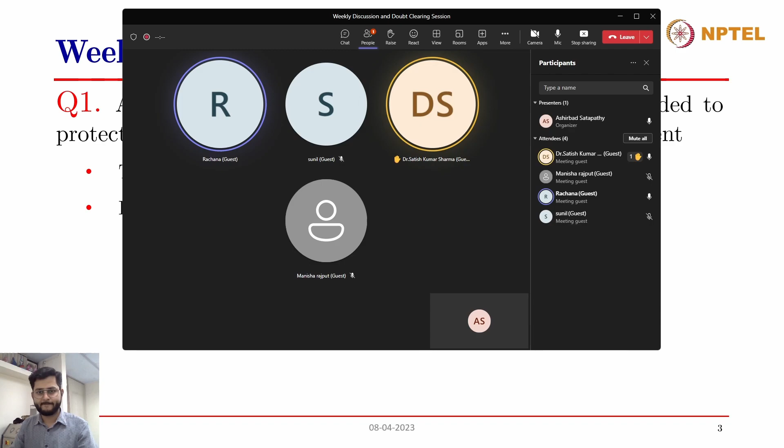I guess nobody- Rachana, do you want to answer this question? Which one, sir? The first question that I just read out. Can you see my screen, Rachana? Alkyd coatings can be recommended to protect the exposed concrete surfaces in a coastal environment. True, sir, true. Alkyd coatings can be recommended as per the lecture, because some questions are related and some are not. No, I differ.

Answer is false. In the lecture, they told that this type of coating is meant for steel and timber, not for concrete. So the statement is false. Yes, thank you, Dr. Satish. Actually, this is a false statement. If you have watched the lectures carefully, alkyd coatings are not recommended to be applied on concrete surfaces. Rather, these types of coatings are used to protect metallic components like steel or any other metal components, or even timber surfaces. This was in fact specifically mentioned in the lecture, that on any kind of concrete surfaces, these kinds of coatings should not be used. So this is a false statement. Alkyd coatings are not to be used on concrete surfaces.

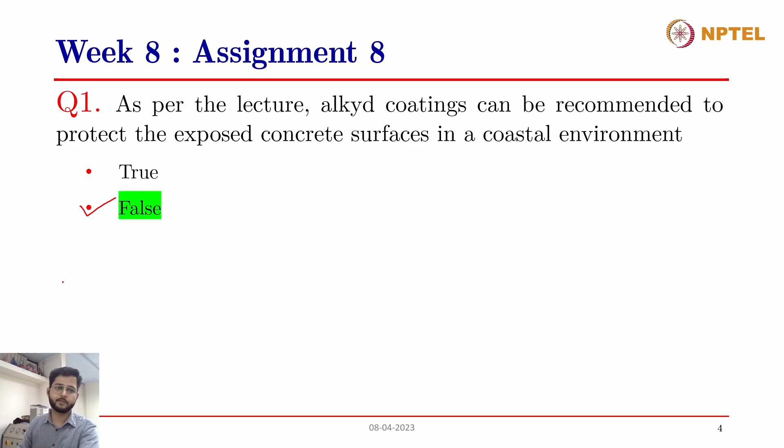All right, moving on to the second question. It was decided to coat the interior surface of the chimney of a newly constructed nuclear power plant. It's a nuclear power plant, and the interior surface of the chimney is to be coated. Which among the following should be the two primary features of a good coating material for this case?

These are some of the features that have been listed out: high vapor permeability, high dynamic crack bridging capability, low resistance against temperature, good resistance against possible contaminants. Which of these features, two features, will you be selecting for coating the inner surface of a chimney in a nuclear power plant?

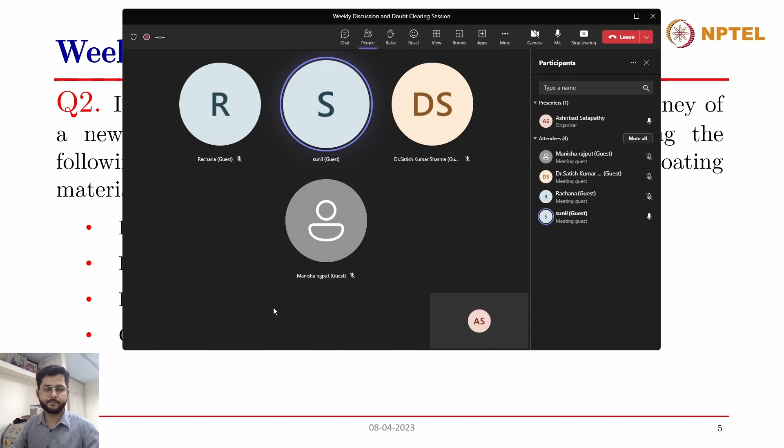Yes? Can somebody answer? High dynamic crack bridging capability and good resistance against possible contaminants. Okay, and would you also try to answer, Sunil, why would you choose these two properties and not the other ones?

Actually, I am not familiar with this question. It is the 8 week assignment, and now it is running week 11, 12, so I am not remembering exactly the theory behind this. Okay, that's the issue. As per lecture, high dynamic crack bridging capability... but after checking there is a good resistance, I checked it out, I only clicked the second one.

Okay, thank you for answering. Both these answers are correct: high dynamic crack bridging capability and good resistance against possible contaminants. First of all, high vapor permeability is not to be considered because we don't want water vapors or any other gaseous substances to get inside the concrete. Therefore, one of the primary requirements of a coating is to prevent the ingress of these vapors into the concrete, and so it should not be permeable to vapors. So this is a wrong statement.

Second is high dynamic crack bridging capability. Since this is an industrial structure, a chimney, it might be exposed to vibrations, so there is a possibility of formation of cracks due to dynamic forces, since a chimney is a stack-like structure and a very high rise structure. Therefore it is also subjected to wind loads at a greater height, a large amount of wind loads, and so there are a lot of dynamic forces acting on this stack-like structure, which leads to a possibility of crack formation.

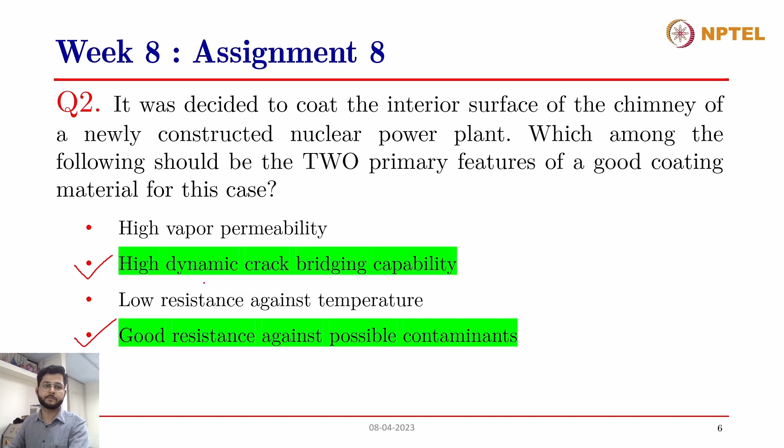Moving on to the third question: applying polyurea coatings over concrete pipes are sensitive to blank and blank. Some properties listed regarding polyurea coatings include pot life, mixing ratio, relative humidity, and atmospheric temperature. Can somebody answer this question?

Pot life and mixing ratio. Yes, pot life and mixing ratio. Why would you answer that?

Can you explain what is pot life and what is mixing ratio, Sunil?

Anybody else wants to try? Yes, Dr. Satish, you can go ahead.

For these types of polymer systems, in case of any material of that kind, pot life is very important because beyond a certain time limit it will not be very effective and will not be usable, so you have to keep control of the timing. Mixing ratio is again very important—these are organic materials, and unless you mix them in the specified proportions, you can run into problems.

Okay. I guess I was stuck—there is some issue on the internet on my side, I guess. Yeah, probably. Yes, I think you missed some of it.

Dr. Satish, you were explaining what pot life and mixing ratio are. Sorry, I missed your statements due to some issue on the internet.

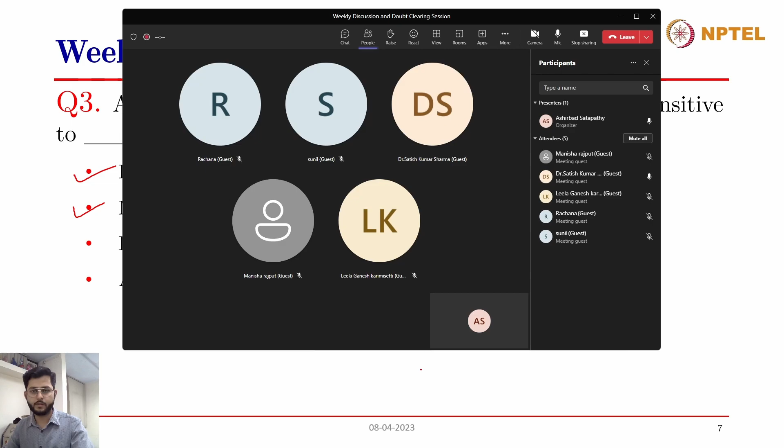For any chemical of this kind, mixing ratio is very important, and there is a certain time limit within which you have to utilize the material, otherwise it will be wasted. So pot life and mixing ratio are the most important aspects. Since only two options are asked for, these two are the most important—others may be important, but the question asks for only two.

Thank you, Dr. Satish. Yes, so these two are the correct answers: pot life and mixing ratio, in case of polyurea coatings, polyurethane coatings, or any kind of epoxy coatings as well.

What is pot life? I'll explain. In case of these types of coatings, they don't come as a single compound. Rather, they come as two compounds: one is part A and part B. One is the polymeric substance that will be applied as the coating, while the other is a solvent or accelerator that allows for the setting of both compounds when mixed together.

Part A is generally a pigment or polymer, and part B could be an accelerator or solvent. These two parts are mixed together, and the mixing ratio is the proportion of part A to part B.

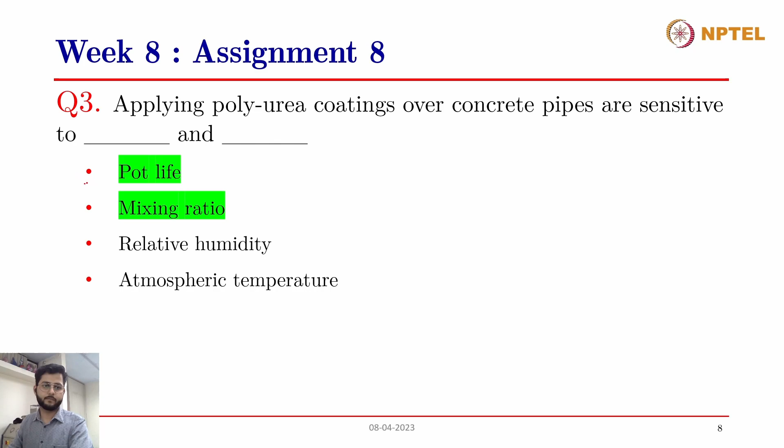So these two are the answers.

Moving on to question number 4. Typically, which among the following two waterproofing systems will help to provide a barrier and prevent the capillary rise of water from the ground to the concrete floor? The options given were horizontal water stops, drain boards behind the wall, weep holes, coarse sand layer below the floors.

This is regarding waterproofing systems to prevent the capillary rise of water from the ground to the concrete floor. So this is a horizontal surface, the concrete floor, and we want to prevent the water from rising from the ground. Which of these two waterproofing systems would you choose in this case? Yes, can somebody answer?

Yes, Dr. Satish, go ahead. Since other people are not volunteering, I would like to reply.

Yeah, your last line was not very clear, can you repeat it again, Dr. Satish? In case of coarse sand, capillary action will be minimized or will not exist. You require very fine grained soil only for capillary action, like clay etc. Here, it is a coarse sand, so it will not permit capillary action, so it will be quite effective in combating against the capillary rise.

And regarding weep holes and drain boards, would you also answer why would you not choose them? These are relating to lateral movement. In case of retaining wall, you require weep holes, so there is horizontal movement of moisture involved for releasing the pressure basically, and drain board behind the wall. If we are talking about retaining wall, this could be one option, but here the intention of the question appears to be relating to upward movement of ground towards the construction. Thank you, Dr. Satish.

Very well explained, so yes, horizontal water stops. So typically these are the components or tools to prevent the rise of water or the transport of water across two surfaces.

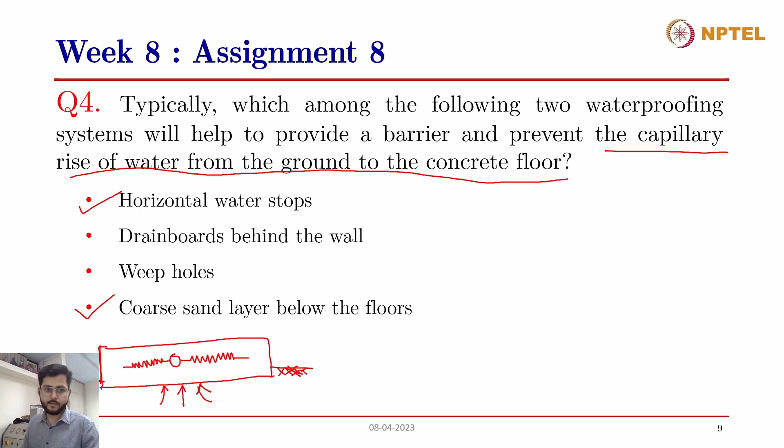And how they work. So typically, let's say this is a horizontal water stop, and let's say this is a concrete element, and this is a slab on grade, actually a concrete slab on grade. So there is ground beneath this concrete surface, and there is exposure to water table beneath the concrete surface. So the water can rise inside the concrete, and this is one layer of concrete, and beyond there is the concrete floor, right? And what we want is we do not want the water to go to this region.

So the water can get inside, however, what if there is a horizontal water stop like this? So the horizontal water stop, what they have is these rough corrugated surfaces on these water stops, and whenever the water has to pass through these, they extend the length of the path of the water. So typically the water has to now go through these corrugations and travel back upward, and then only it can go inside the concrete surface. So this will be the path of the water now. So they increase the path of the flow of the water.

And therefore, due to the increased path, the water will be prevented from flowing inside the concrete. So these are the horizontal water stops, and this will work very efficiently in the case of capillary rise of water from the soil into the concrete surfaces, because these are placed in a horizontal manner. So if let's say this is a wall footing, I can just show it like that, then these water stops will be running along this wall footing.

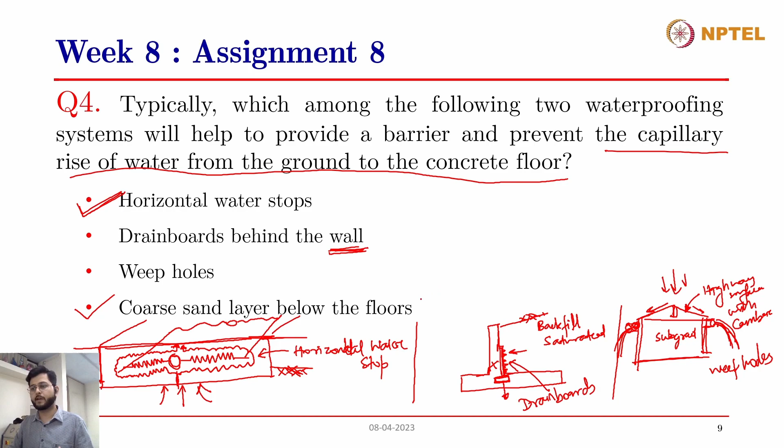And the final point - weep holes are given when there is surface accumulation of water, not capillary rise of water from beneath the ground, so weep holes will not work in this case. Then there is a coarse sand layer below the floors, and this is what Dr. Satish has already answered rightly - using a coarse layer of sand or coarse subgrade beneath the concrete floor.

How does this prevent capillary rise? Because for capillary action to take place, the pore size has to be very small, the void size has to be very small, and this size of voids is present generally in clay soil systems. So whenever coarser particles are spread over the soil surface, the void size will be much larger, and therefore capillary action cannot take place, and the rise of water due to capillary action will be prevented.

So using a coarse sand layer - of course this sand layer has to be properly compacted to prevent any differential settlement in the concrete floors - providing a coarse sand layer below the floors will prevent the capillary action or capillary rise of water to the concrete. So these two are the correct answers.

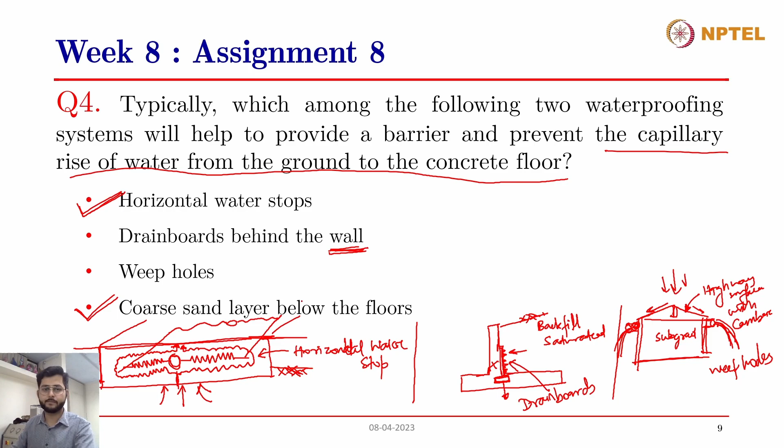Moving on to the fifth question: Which among the following can be given the least consideration while selecting a waterproofing membrane? I guess somebody had asked a doubt regarding this question in the last session as well, so we'll discuss it again. The options given are: surface finish before installation, elongation and tear resistance of the membranes, compatibility and bond of the membrane with the concrete substrate, compressive strength of the membrane, and overlapping and gluing of the membranes.

Which of these properties would you give the least consideration to while selecting a waterproofing membrane? Can somebody answer?

Yes, Dr. Satish, go ahead. I know, therefore I try to reply to the question. Surface finish is important. Elongation and tear resistance of the membranes - that is also very, very important. Compatibility and bond - very, very important. Compressive strength, in case of a skin that is a thin skin, so that is not that important. We'll go overlapping and gluing, that is again very important. So compressive strength is the answer - the least consideration will be given to compressive strength of the membrane. Thank you, Dr. Satish.

Yes, so we'll go over these properties one by one and discuss them. First is the surface finish before installation. This has to be given utmost care before applying any kind of waterproofing or polymeric coating over concrete surfaces. The surface of the concrete has to be very well cleaned and free from any dirt or dust, so that it allows for good bonding between the waterproofing or polymeric membrane and the concrete surface. Therefore, surface finish before installation has to be given good consideration and done effectively in order to allow for a good bonding.

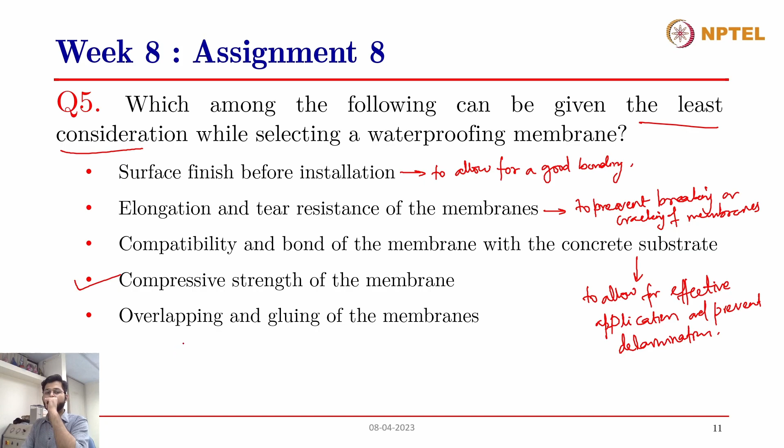So the answer is compressive strength of the membrane, right?

Moving on to the sixth question. In an expansion joint in a building, the depth of the sealant applied is more than twice the joint width. Choose the relevant statement: typically the sealant would fail due to adhesive failure; typically the sealant would fail due to cohesive failure; typically the sealant would relax into a stretched shape and deform. Which of these statements is true for a situation in which the depth of the sealant is more than twice the joint width? Can somebody answer this question?

Yes, Dr. Satish, go ahead.

In case the sealant depth is less than twice the width, it will fail by cohesion. Now in this case, the depth of the sealant applied is more than twice the joint width. In the lecture, they told that failure will be due to adhesion. So the first option is correct. Thank you, Dr. Satish.

Yes, so there are several types of failure that might occur when a sealant is applied in an expansion or contraction joint. So let's say these are two concrete elements, and they have a sealant coating. There is a backer rod provided, and this is a sealant coating. This is the backer rod, provided in an expansion joint.

The backer rod is generally provided to allow for the expansion joint movement of the expansion joint without providing a three-way adhesion between the sealant and the concrete surface. So typically when there is a backer rod and the sealant, this is the surface of the sealant. When there is a backer rod, the sealant is in contact with the concrete surface only on these two locations and not on the third location, third side.

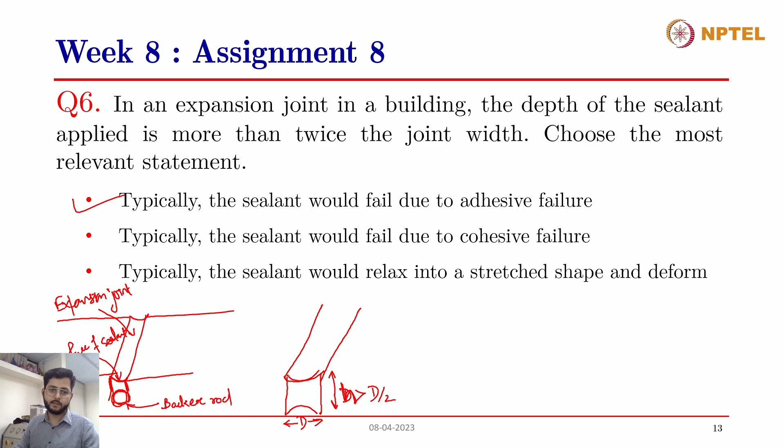One is adhesive failure. Now, if this is the concrete surface and the sealant is like this, and the depth is larger. So I'll mention the depth as H, which is larger than D by 2, and this D is the diameter of the backer rod. If this depth is greater than D by 2...

then this sealant surface will tear off from the concrete, will sag, it will tend to sag, and the sealant will tear off from the concrete surface, and this will lead to an adhesion failure. So this is an adhesion failure, which is the case in this question.

But when this depth is too short, generally the depth of the sealant is kept as half the diameter of the backer rod. But if the depth is too short, let's say in another case, I'll draw another figure. This is the sealant surface, and the depth is too short. So the H is less than D by 2.

Then what will happen is there will be breakage between the sealant. The sealant will have a cohesive failure because it will not have a sufficient thickness of the sealant and will not be present at these locations, and due to the movement of the concrete, due to the expansion and contraction movements, this sealant will experience stresses and it will tend to break. So it will show cracks like this. There will be breakage of the sealant, and this is a cohesive failure.

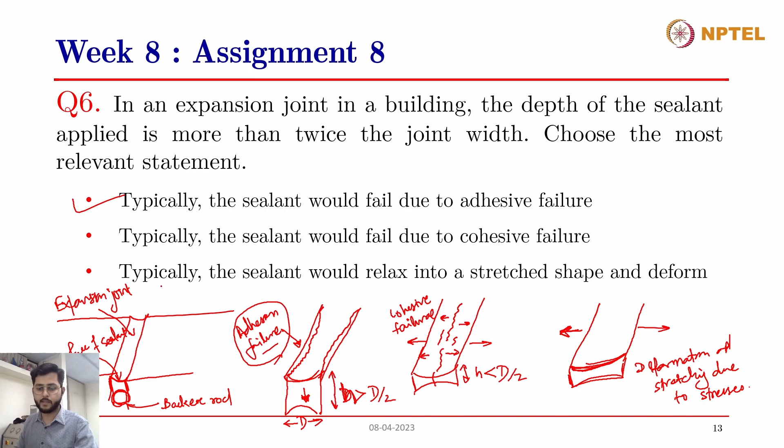But in this case, what is mentioned is the adhesion failure because the depth of the application of the sealant is more than twice the diameter of the backer rod, or twice the joint width, and therefore this will create a situation where the sealant will peel off from the concrete surface and there will be an adhesion failure. There will be debonding of the sealant from the concrete surfaces on both sides. So this is a case of adhesion failure, right?

Moving on to the seventh question. What are the three key properties to be considered while selecting a sealant system for a rooftop? These are some of the given properties of the sealants, and you have to choose three major properties of the sealant for a rooftop: puncture resistance, high stiffness, high thermal conductivity, UV and chemical resistance, or abrasion resistance. Which three key properties would you choose for a sealant which is to be applied on a rooftop? Can somebody answer this question?

Yes, Dr. Satish, go ahead. Please, brother, I don't want to indicate, I will attempt to answer.

For a rooftop sealant system, puncture resistance is very, very important. It is exposed to ultraviolet rays and chemical resistance is also very important. Abrasion resistance also comes into picture because some items may be dragged across the surface. Other properties are not that important. If we talk of priority among these properties, these three are the most relevant.

Okay, thank you, Dr. Satish. So let's discuss all these properties one by one.

One is puncture resistance. What is puncture of the sealant system? Whenever a coating or sealant is applied in a gap or over a concrete surface, typically due to application of a concentrated load at a certain region, these coatings might break at that region particularly by puncture or punching.

Since this sealant system will be applied on a rooftop, the rooftop will be exposed to a lot of different environmental effects like rain, snow, or different temperature variations, or sometimes there might be movement of heavy objects over the rooftop. Therefore this sealant system needs to have good puncture resistance.

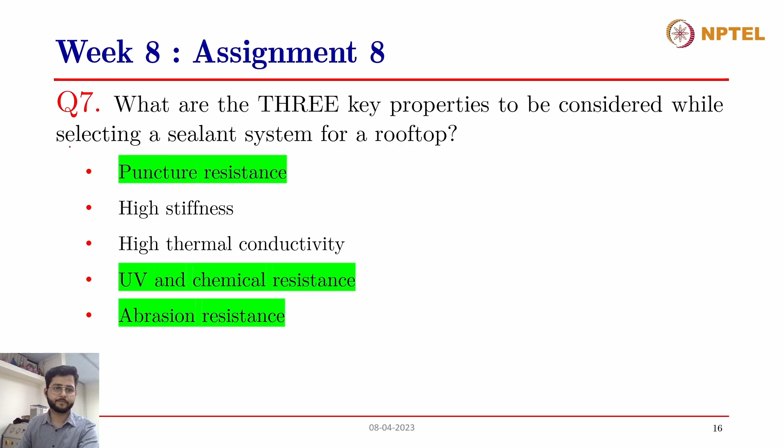These three are the correct answer. Moving on to the last question.

Choose the correct statements regarding the brick-bat coba system. A properly designed and constructed system will give insulation to both water and heat. The system is flexible and prevents the formation of cracks due to temperature variation. Water can seep through the cracks, if any, on the system and can lead to corrosion of the RC slab below. Which of these statements are true regarding the brick-bat coba system?

Yes, Dr. Satish, go ahead. Since brick bats are involved, it will provide insulation value to the roof, and it can absorb a lot of moisture also, up to 20% or so. So it is a good insulator against heat also. So the first one is correct.

Then it's not a flexible system; it's a rigid system, so the second option is not correct. Then, water can seep through the cracks. Yes, cracks can take place, and water may go in, and this water may act as a sink, and it may corrode the RC slab down below. So the third option is also correct.

Thank you, Dr. Satish.

As the name suggests, brick bat coba systems contain these brick bats, which are provided as a layer over the RC slabs. The typical use of this brick bat coba system is to provide insulation against water as well as heat. And since these are fired clay bricks, they are actually good insulators of heat, and they provide a good resistance against temperature variation, so they protect against the rise in temperature due to the outside environment.

So providing a brick bat coba, if it is properly designed and constructed, will provide good insulation against both water and heat. So this is a true statement.